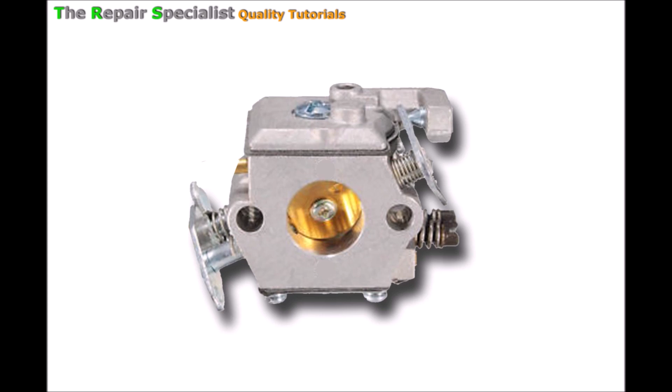First of all we'll bring in a carburetor - normally we get a little tiny carburetor like this on the two strokes. To show my point here, we'll have to make this diagrammatically. This is a side view of something like the carburetor we've just seen. We'll move this carburetor over here, and on this side we'll add the engine.

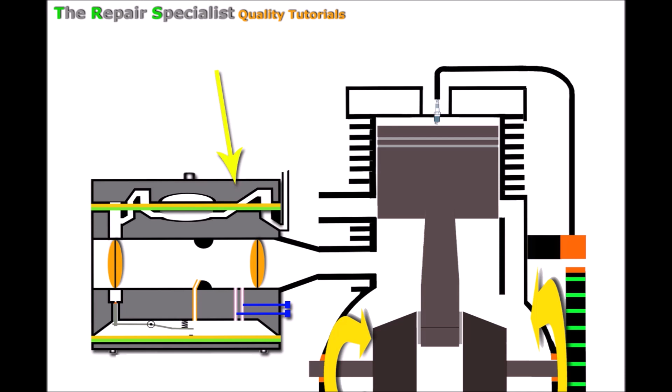To show you how the two-stroke engine with its carburetor can run in any position, upside down, to the side, etc., I need to go through the workings of it to show you how that allows for that. First we'll break it down and take a look at how the engine accomplishes this, then we'll see how the carburetor fits in. So focusing on the engine, we'll remove the carburetor and move the engine over here.

There's our two-stroke engine, but I want to put a four-stroke engine next to it so I can show why and how two-stroke engines can work upside down, and why the four-stroke in comparison cannot. Let's take a look at the two.

Without going into too much detail on how these engines work, because I've already got videos here on YouTube about how these engines compare with each other with function, I just want to go through the key differences as to why we can't use certain engines upside down and why we can use two strokes.

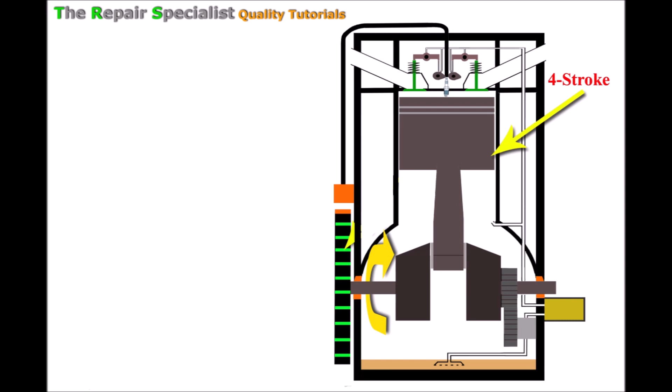First, let's take a look at why a four-stroke engine can't work on its side or upside down. It may seem obvious to somebody who knows a little about engines, but it all relates to the actual engine oil inside the sump here. So why does this engine oil stop this engine from being used in other positions?

Let's turn one of these engines on its side and take a look. If we did turn one of these on its side, we'd notice the oil wouldn't actually be in this position - it would be more like this. I realise I've put this diagram to the extreme, really horizontal, but we certainly wouldn't need the engine in this extreme position to have problems here. In fact, in this position the engine probably wouldn't run at all. I'm just overemphasising this for the sake of putting my information across.

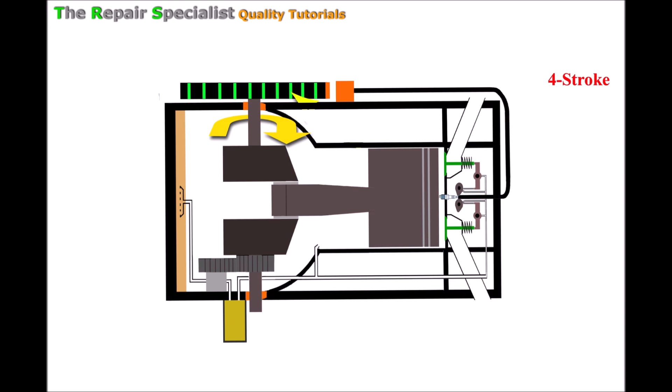We've already established that the engine oil would be in this position because it's a fluid. The trouble is that even before the engine started, the fluid will start to go up towards the piston and gradually seep up alongside it, even though there's a very tight clearance between the piston and the cylinder.

When the engine starts and the piston begins to lower, two main things happen. First, that lowering piston slaps into the oil sitting behind it, which lowers the piston's speed and efficiency. Because there's such a concentrated amount of oil in an unnatural place where it shouldn't be, some of that oil manages to get past the piston and seep past the piston rings, finding itself at the top of the piston where it shouldn't be. Even though it's a small amount, it still causes problems, and we'll see that shortly.

As that slight speed-reduced piston comes down even further to bottom dead centre, it experiences more of that oil behind it.

And as it drives into it, it experiences even more resistance, because we've got an even greater mass of oil as it gets down further. So we've slowed the piston down even more because of that greater amount of oil. Plus, there's oil gathering more than usual between the piston and the cylinder, creating a drag on the piston.

I just want to emphasise that the gap between the piston and the cylinder wouldn't be this large. I've had to exaggerate it this much to get my point across. The actual clearance here would be so small it could hardly be seen.

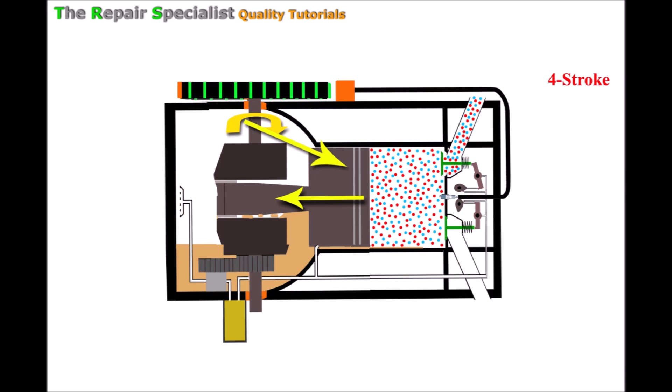As that piston starts to rise again, we might think it will have free travel up the cylinder, but we'd be wrong, because all of that oil that came past the piston ring, now sitting in front of the cylinder, is causing a drag on the piston. It may only be a smaller drag, but it's still a drag.

Also, we've got the drag from the oil in between the piston and the cylinder, which is also lowering the efficiency of this piston again.

And when the piston gets to top dead center on the compression stroke, where it should be compressing just air and fuel, we find it's now also trying to compress all of that oil that got to the top of the piston, and that's causing problems with combustion.

Because when the spark plug fires, instead of igniting that rich mixture of air and atomized fuel for a great combustion to push the piston back down, it's instead trying to ignite the fuel and air as well as this oil.

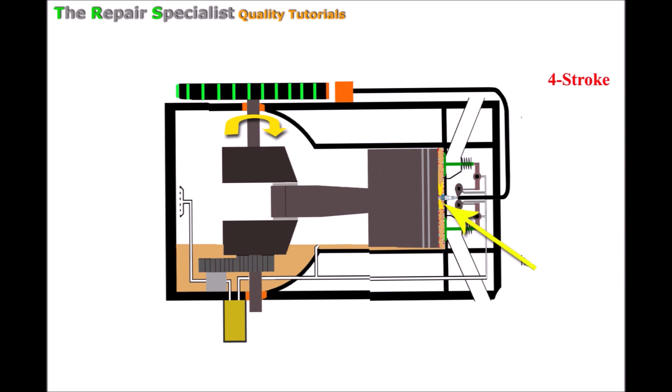And this engine oil is nowhere near as ignitable. So the factors reducing the efficiency of this piston are that it was already coming up at a reduced rate due to the drag between the piston and cylinder, and now it's trying to compress air and fuel with oil in it, which is harder to compress, slowing the piston down even further.

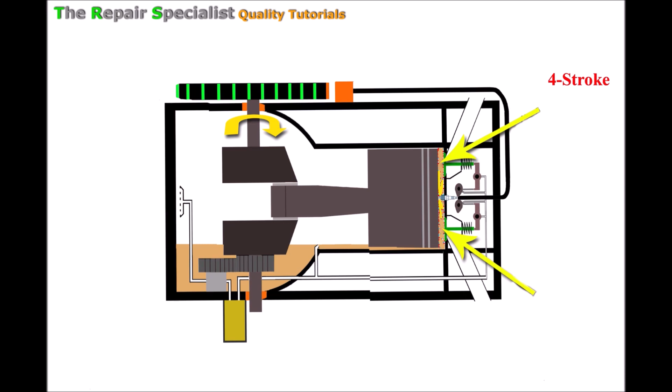Now that combustion has taken place, the piston will be pushed back down the cylinder, but instead of travelling down at a high rate from good combustion, we've got substandard combustion because of the oil that was in there. So we didn't have the same explosion, and it's now travelling down the cylinder at a lower rate.

And as if that wasn't enough, we've still got the oil drag on this side of the piston as before, as the piston's lowering.

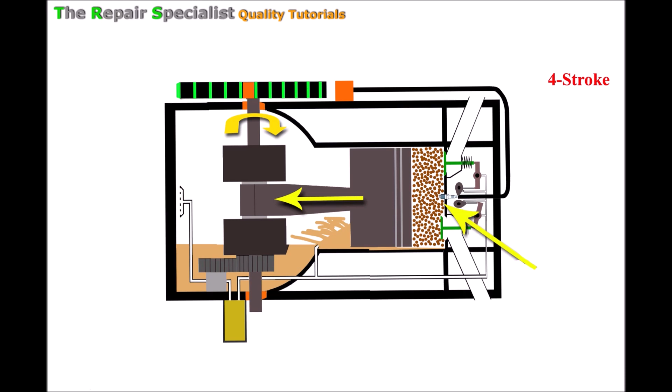And if we were to look above the piston now, in the wake of the combustion that's just occurred, we wouldn't have the usual exhaust fumes. It'd actually look more like this - there would be so much more waste in the form of blue or black smoke as a result of that incomplete combustion.

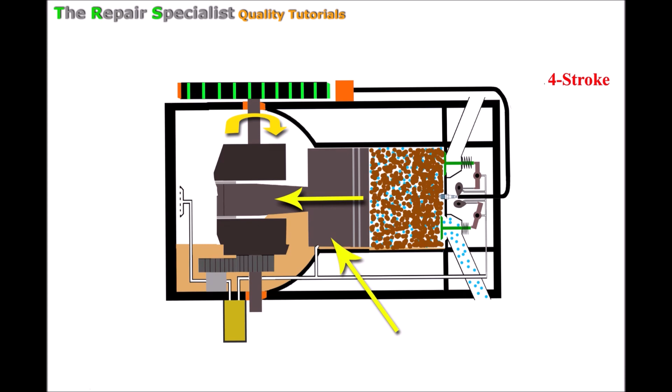And so that piston goes all the way down to the bottom of the cylinder to its lowermost point, with all of these drag points the oil is creating. And as the piston lowered, even though it was only on the power stroke and not an induction stroke, we're still going to get some of that oil seeping past the piston ring and entering the top of the piston again.

Okay, so now the piston's coming back up, and we've still got that drag because of the oil between the piston and the cylinder. And on top of that, slowing it even further, we've also got that oil on top of the piston, trying to push into it and slowing the piston down.

And of course, as the piston comes up, it's pushing all of those exhaust fumes out the exhaust valve and out of the exhaust. And as we've mentioned, it's going to be thick blue or thick black smoke because of the incomplete combustion of that oil on the last power stroke.

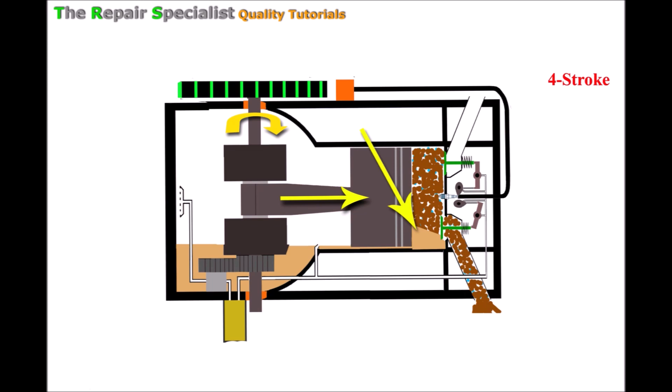And at the same time, this oil that's seeped past the piston on this stroke also starts to get forced out of that exhaust valve and through the exhaust as the piston travels up further. Again, this diagram is just to emphasise a point.

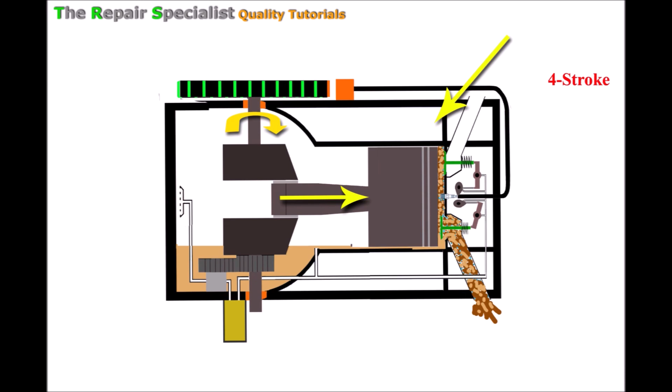I've tilted this engine to an extreme here just to explain things. Because of the position it's in, in reality this engine most probably wouldn't run at all. One thing I haven't mentioned yet is that if we tilt the engine like this, the oil can cause component damage. To explain that, we'll revert back to the engine as the piston's rising on the compression stroke.

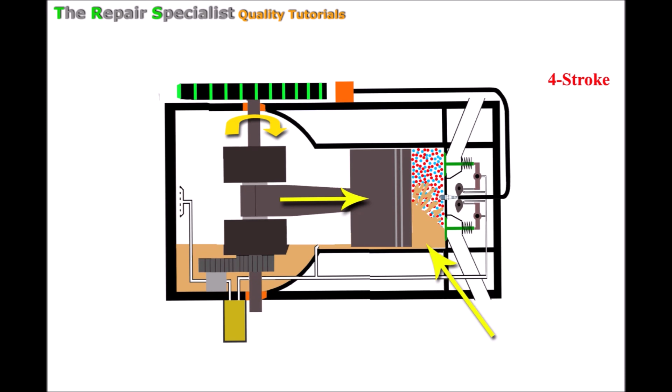As the piston's rising and oil seeps past the piston, sometimes more oil than expected ends up at the top of the piston, so it would look something like this. Because we've got that extra oil there, when the piston rises further into the compression stroke, it actually hits all of that oil. Oil is incompressible, and because the piston's moving quite fast, it hits that oil but stops dead and doesn't go any further.

The oil can't be forced out anywhere to give relief from this pressure because both valves are closed, since we're on the compression stroke. Now, because before all of this we had a lot of drag with this piston and incomplete combustion, meaning it wasn't moving as fast as it should be, this piston might likely come up and hit this oil and just stop the engine without any further damage. But if the piston's moving much quicker and then hits this wall of oil, it's going to create some damage somewhere.

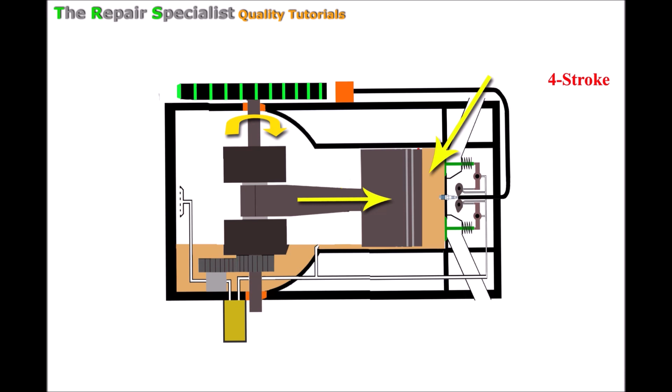That physical trauma is normally in the conrod here. Because the piston wants to come up so fast and it hits that wall of oil so hard, the conrod can sometimes shear. When this happens, where the piston is stopped by the oil like this, we call it hydraulic locking. So in this instance we'd say this piston is hydraulically locked. I've seen this happen a few times where customers have brought engines in to us, and we've taken a look and seen everything I've explained, with damage to the conrod.

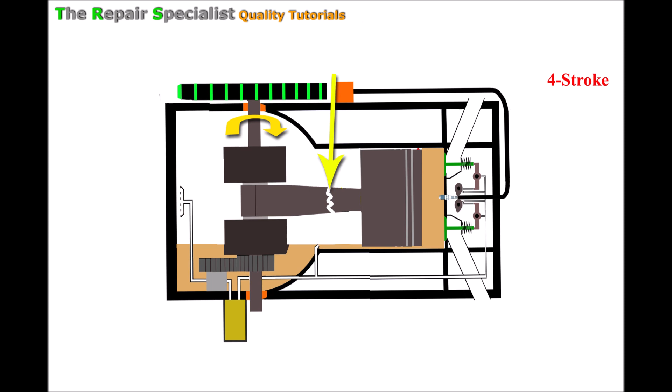Sometimes the conrods do shear like this, and sometimes there is some less severe damage. In other cases, there's no damage and the engine has just locked up. But the damage that occurs generally affects the conrods or the end caps, and it's not necessarily in this exact place, I'm just making a point here. There are other areas that can be affected, like the flywheel. Sometimes the key that locks the flywheel onto the shaft in a certain place can shear and allow the flywheel to turn unnaturally, in an unnatural position.

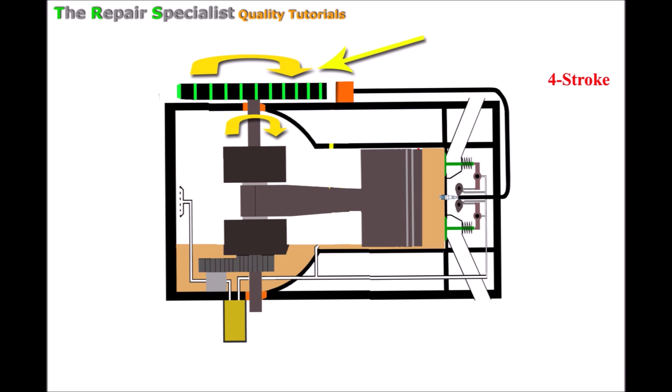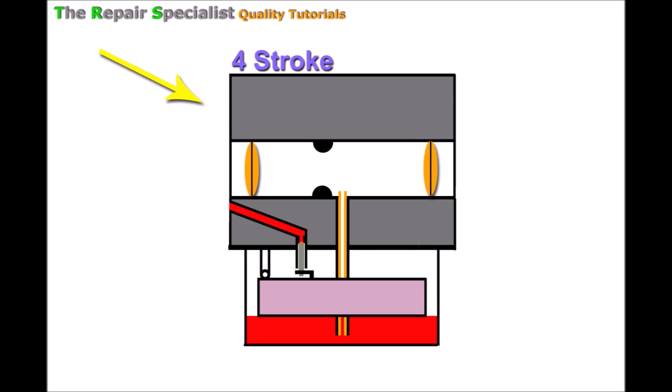One important thing I haven't mentioned all the way through this, and another reason we can't use a 4-stroke engine on its side like this, is the carburetor. This is a side view shown diagrammatically, and underneath here we've got the float chamber, which is basically a fuel reservoir for the carburetor. This is another very important reason we can't turn the engine onto its side. To better explain this, I can take the carburetor now and put it in situ onto the engine, and it'd look something like this.

Again, this is just a drawing to explain my point, things won't be exact to scale, but this is roughly where it would be, basically attached to the side of the inlet manifold. So now if we tip this engine onto its side, we know the oil won't be here, it'll be down here. And it'll be a similar situation inside the carburetor.

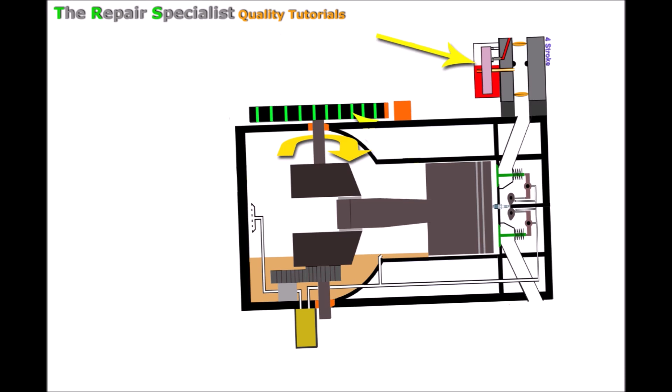The fuel won't sit at the bottom of the float chamber like this. It will of course sit like this because of gravity. In doing so, that fuel can start to seep in through the main jet and start to drip down into the inlet manifold of the engine. As it continues to flood the inlet manifold, it seeps past the inlet valve depending on what position the inlet valve's in.

Let's say the inlet valve is nice and tight there, let's say this engine was stopped on a power stroke, so the valve is airtight and fluid tight, then the fuel would congregate here. It doesn't mean this wouldn't cause problems, because indeed it would, because when we turn the engine back to its normal position and try to start it, we'd get an extra flood of fuel that we don't need inside the cylinder, and there'd be running problems.

In fact, it would flood the engine. Of course, the valve could be in this position, but it's more likely to be in a position that will allow this fuel through.

And when it does go through, it starts to congregate in the cylinder here. Remember, this engine isn't yet running, it's just been left on its side in its stopped position. But what we tend to find here, as with the oil, when it seeps past the piston rings when the engine's running and then it goes to the top of the piston, we get the same problem here with the fuel. But we don't have to start the engine for this to happen.

The fuel, because it's so light, not as thick and viscous as oil, seeps past the piston rings on its own. And in doing so, it starts to mix with the engine oil there, reducing the quality of that engine oil and its ability to lubricate, because it's thinning the oil down, and also increasing the fluid mass inside the crankcase, inside the reservoir.

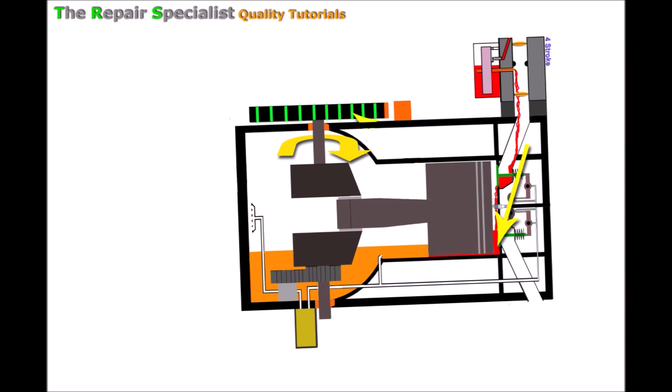Okay, so that's why a 4-stroke engine can't work on its side. So let's have a look now why a 2-stroke engine can. The 4-stroke engine has the oil, and that's why it can't. But if we take a look at the 2-stroke, we haven't got any of that oil inside the crankcase here. As we know, we mix the 2-stroke engine's lubricating oil with the fuel.

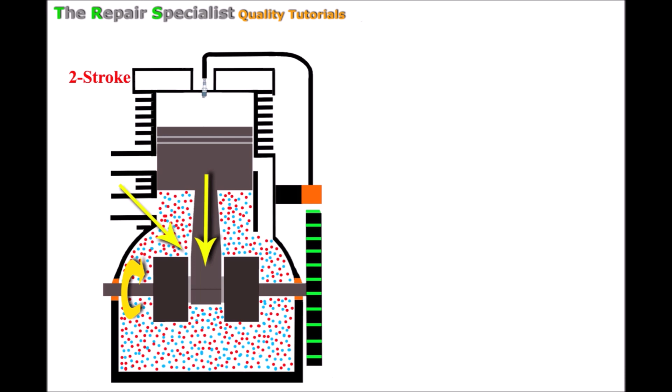Either that, or it's injected in a little later as it goes into the engine. But nevertheless, as the engine uses the fuel, it also draws all that lubrication in, and it lubricates all the parts of the engine as it uses the fuel. As you can see, in some places I've shown that there's no air and fuel in the crankcase, but when the engine's running, there always will be some.

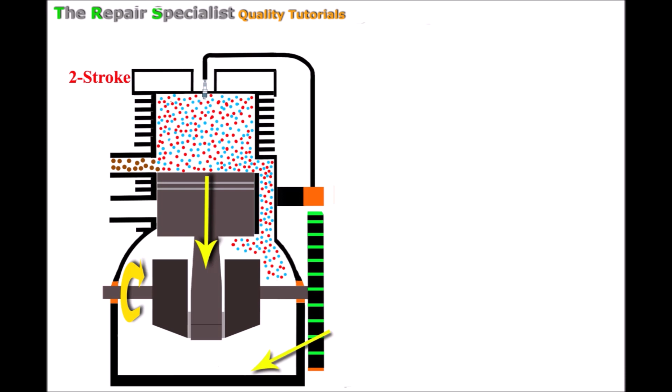I've only shown it flowing like this so that I can show the actual flow of the air and fuel through the engine. But the moral of the story is there's no oil down here in the crankcase like there is in a 4-stroke, and so we can use this engine in any position like this. And that includes being able to run just as efficiently upside down.

And so this relates to how the engine can do this, but what about the carburetor? Let's take a look at that. A little earlier on we took a look at the 4-stroke carburetor and we saw that because of the fuel inside the float chamber there, we can't tip this carburetor onto its side, because the fuel spills through into the main jet and comes out in the induction area right down into the engine, causing those problems we mentioned.

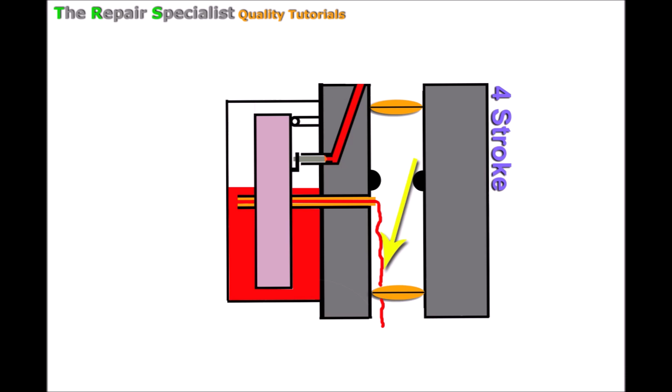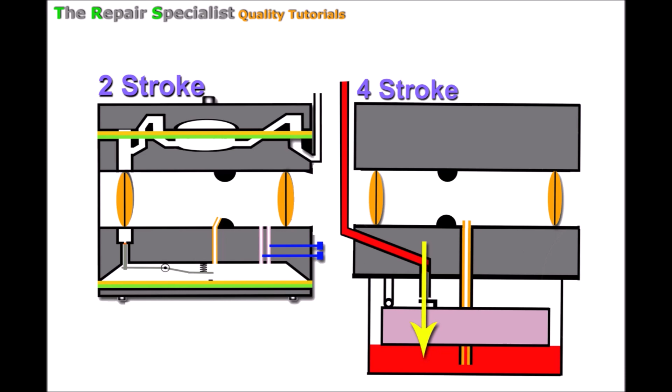So taking a look at the carburetor in its normal position, we see that it needs to be in this position in order to function correctly. We know that because we need a supply of fuel fed by gravity to this particular type. And it's that gravity feed which fills the bottom of the float chamber with all that fuel, ready to be used by the carburetor. That means we have to have a fuel tank positioned higher than the carburetor in order for it to feed the carb.

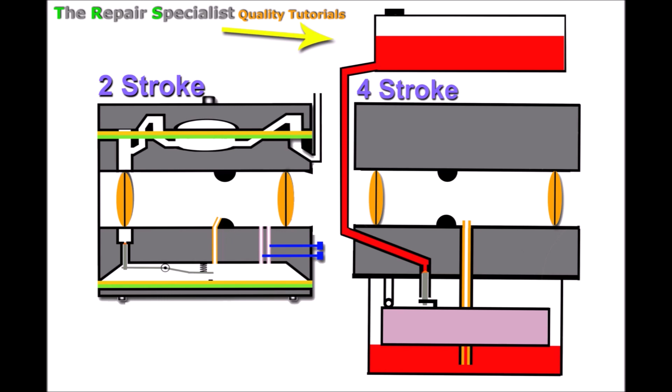But as we'll see, the two-stroke carburetor is very much different. There is a storage reservoir here in the carburetor for fuel to be available for the jet, but this fuel down here is more containable. It doesn't seep out of this area as it does with the four-stroke. That's because in order to allow any fuel out of here, there has to be more fuel allowed to flood in, or some air or something to take its place. Otherwise, there would build up like a little vacuum in here, not allowing any fuel out.

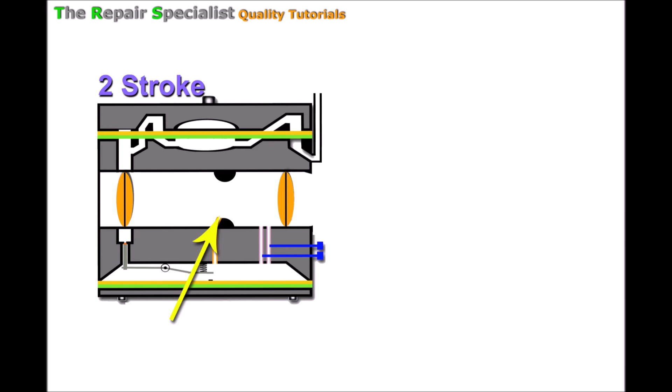And that's regardless of whatever position this carburetor's in, even if it's totally upside down like this, and I'll explain why a little more. For now, let's just flip it back over where it was. There we go. And just to explain things a little better, let's revert back to our four-stroke carburetor again. As we know, down here in the float chamber, that reservoir, we've got the fuel, and above the fuel on the four-stroke, we've got air in there. We need this normal amount of air in there for two main reasons.

To explain the first reason, let's imagine this carburetor has never had any use, so it's totally empty inside, no fuel in there whatsoever. Because there's no fluid for the float to float on, the float would be down at the back under its own weight, pivoting at the front here. This is how the carburetor would be if it was brand new and had never had fuel in it and the engine had never been started, or if it had been cleaned out and put away for winter.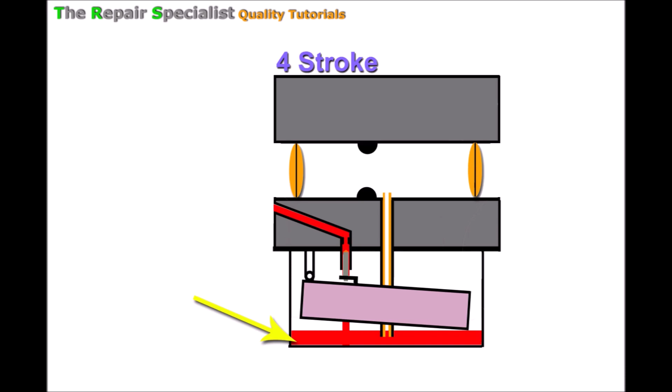With the float down and the needle valve open, adding fuel now means it will flow right past the needle valve and into the bottom of the float chamber. When the fuel flows in, it lifts the float, but what I want to emphasize is that as the fuel comes in, it occupies space inside the float chamber. The more fuel that comes in, the more space it will need to occupy, and above the fuel there is the air I was talking about earlier.

As the fuel flows in, this air has to move somewhere, otherwise the fuel wouldn't be able to flow into the float chamber. What happens is this air escapes out of the float chamber through a special tube, like a ventilation tube. These vary in shape and size depending on the carburetor type, but they'd be something like this. So as the fuel rises, the air above it escapes out of this tube and out of the float chamber.

As long as the carburetor is in its correct upright position, no fuel can escape down this breather tube, because the level of fuel only comes to this level—it will never come to the top. That's because when the fuel gets to a certain height, the float lifts up and shuts off the needle valve, stopping any more fuel from coming through.

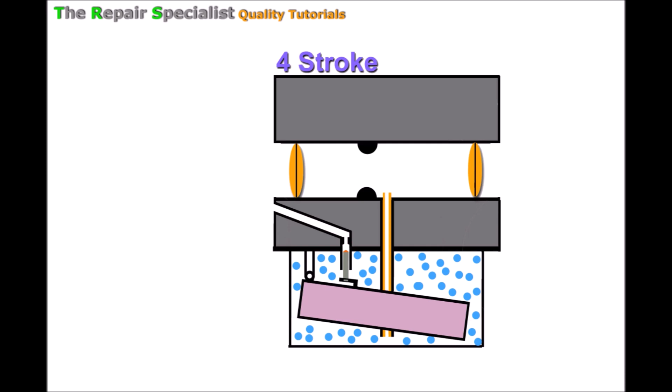Now let's take another look at this unvented carburetor, where in this scenario the air can't escape when fuel comes in. Let's see what happens. It would most likely try to come into the float chamber, but as the fuel flows in, it tries to push out that air above it, and it can't do so well. It might get to a certain level, but as it gets further up, it'll start to push against that air.

It won't be in high enough concentration or pressure to compress that air. As the fuel continues to flood in, the little air pressure in here builds up enough to push up on the fuel, stopping it from entering the float chamber. Just for illustration, I've shown the fuel being this high because it will rise to the bottom of the main jet.

Remember, the bottom of the main jet will allow air out, so it allows that expansion of fuel. But once the fuel reaches the bottom of the main jet, no more air can get out because the fuel is now blocking the bottom of the hollow tube, preventing it. So in a nutshell, the problem here is we can't get enough fuel, or the right amount of fuel, into the bottom of the float chamber.

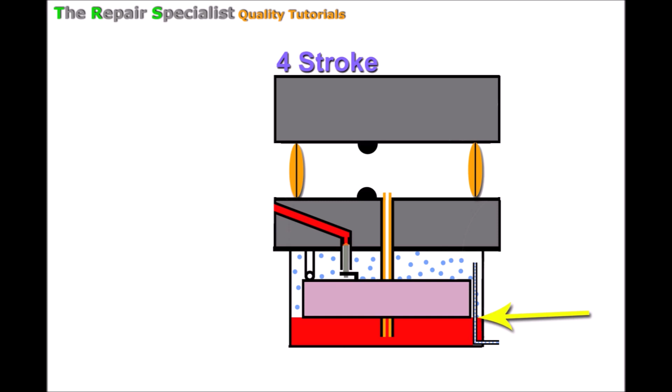With this, as the engine tried to run, it wouldn't be able to efficiently take the amount of fuel it needs, and it wouldn't run well at all. So really what we'd encounter here is a fuel starvation issue. We can see now why this simple but effective breather system is vital for the carburetor.

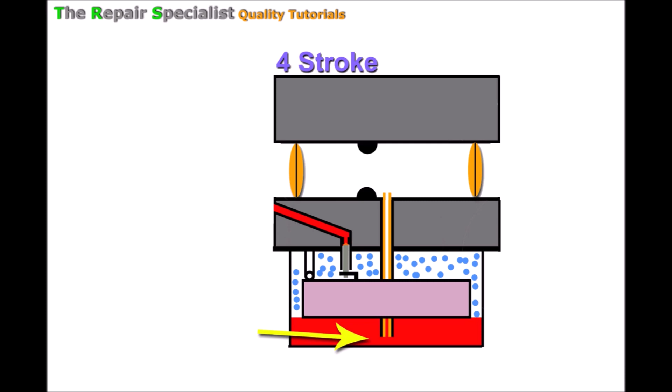But let's look at another scenario now. Let's imagine we can get enough fuel inside the float chamber. Even if we could get enough fuel down here, when we start the engine, the fuel starts to leave the float chamber through the main jet and into the inlet of the carburetor, where it's drawn out and mixed with air for the engine's usage. Because the engine is quite demanding, the fuel leaves the float chamber quite rapidly, which means periodically we've got a smaller amount of fuel here at the bottom.

And although this fuel is being constantly replaced because we've got the float hanging down at the back, the needle is open, allowing fuel in as it's being used. In certain situations where the engine's more demanding for fuel, such as revving to full maximum revs, or using the choke, we're going to get a sudden surge of fuel out, just slightly more than we can get fuel in.

This may only be for a split second, so we'll always have fuel there to use, but when it does happen, a slight vacuum appears in the air. That's because of this fuel leaving the float chamber, and in order for a vacuum not to occur, we need to replace the fuel being lost with more fuel or air above it.

As we lose fuel out of the float chamber, more fuel does come in. It's when we get sudden surges, where fuel is used in high amounts just for that moment, that we get this vacuum problem. In those periodic moments, we can't get enough fuel in to replace the fuel lost. So just when the engine needs that maximum amount of fuel the most, there would be less available—it's actually pulling back at the fuel to stay in the float chamber.

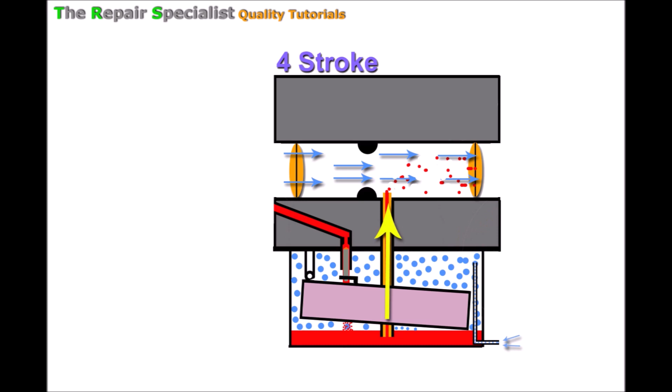With this particular issue, we can see why this ventilation tube is vital. As soon as a vacuum builds up inside here, it will draw in air from the environment into the float chamber, neutralising that vacuum. That means the fuel can now flow freely up the main jet and out into the inlet of the carburetor to supply the right amount of fuel for the engine's needs.

So in a nutshell, what I'm trying to emphasise is that this type of carburetor is designed to run in this position and is entirely reliant on gravity. The fuel comes from the fuel tank under its own weight, under 1 atmosphere, 14.7 pounds per square inch, under gravity, coming down into the carburetor and lying at the bottom, waiting to be used in the engine.

Of course, when the engine draws that up, it's a different matter, but solely to get that fuel to where we need it, it all relies on gravity. And also we've got the float here that goes up and down in order to regulate the fuel coming in—that also relies on gravity.

So we can now see that if this carburetor wasn't firmly fixed into this position, relying on gravity, because that's what it's designed to do, then the mechanisms involved simply would not work the way they should. Therefore the prospect of using this carburetor in any other position than this is near non-existent.

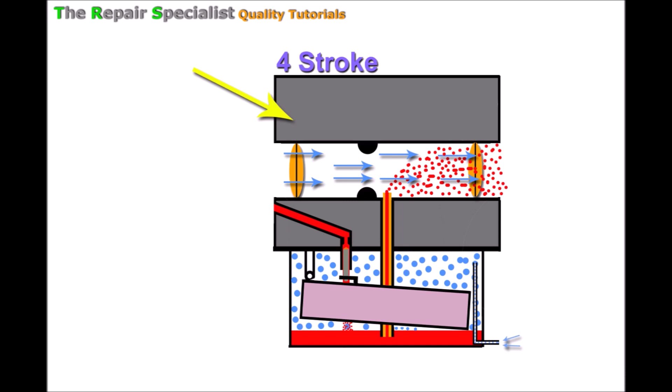So in contrast, the two-stroke carburetor is very much different. One main difference we'll notice, and what's characteristic of these small two-stroke engines, is that we've got a fuel pump here inside the carburetor. So this carburetor doesn't actually have to rely on gravity in order to feed it fuel—instead, the fuel pump draws in the fuel.

Each time the fuel pump rises, it creates a vacuum and draws in fuel from the right hand side of the image. Then when the fuel occupies underneath the fuel pump, as the pump lowers, it pushes fuel out on the left hand side, right round the carburetor, down towards the little needle valve.

The operation of this pump means that the fuel inside this carburetor is under pressure. Unlike the four-stroke carburetor, which relied only on gravity to get that fuel through, this carburetor pumps its own fuel through, so there's going to be some pressure inside as a result. We'll soon see that this is exactly what we need to use this carburetor in any position.

So that fuel has come down to this point, to the needle valve, under pressure. But as the diagram shows, it can't get past the needle valve because it's closed. In reality it actually could, because if the fuel pump is working inside the carburetor, that suggests the engine's moving—so we're cranking the engine to try and start it.

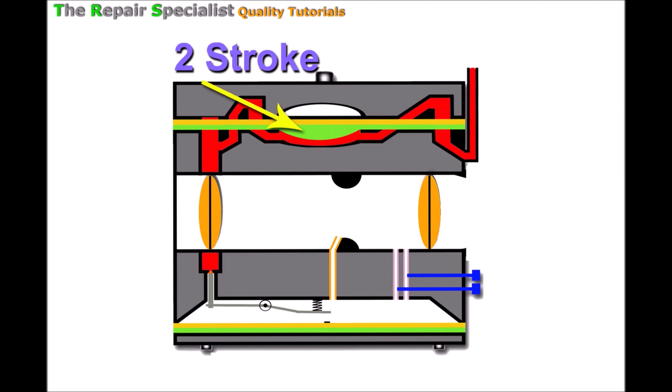If we're trying to start the engine, we'd have air coming through the inlet area of the carburetor. And it's that air that creates a vacuum, as I've shown in my other videos, drawing out of the main jet there. And when that vacuum draws out of the main jet, it pulls this diaphragm down.

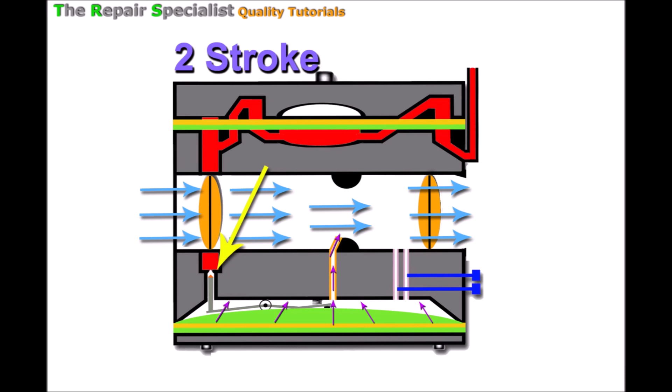This is the metering diaphragm. As it does so, the metering diaphragm physically pushes the back of the metering lever upwards. And because it's pivoted in the middle, it pushes the front downwards. And down with it comes the needle valve.

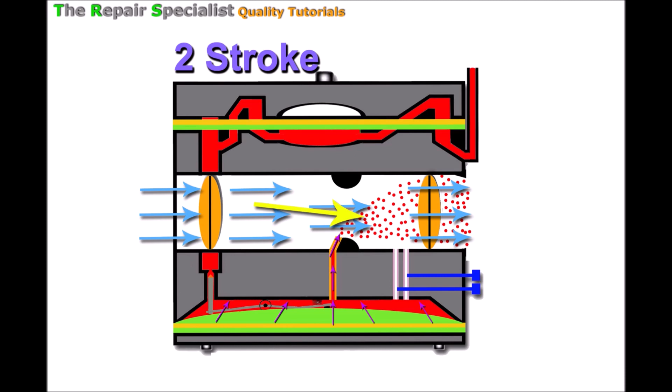That now makes an open channel for the pressurized fuel to flood into the metering area here. And when it reaches the main jet, it can then be drawn out of the main jet by that vacuum. So now with this vacuum pressure pulling out the fuel, and the pumping pressure of that fuel pump at the top pumping the fuel round to this area, we've got a constant supply of fuel for the engine to run correctly.

It can provide that fuel regardless of the position the carburetor's in, whether it be on the side like this or upside down, any position whatsoever. The carburetor will continue to function normally and provide the right and adequate amount of fuel to the engine for usage, and it's designed this way purposely, and we can see now why.

It's because independent of its orientation we can always get fuel up here into the metering area ready for the main jet to use, and that's because of the fuel pump down here that's always pumping fuel under pressure, drawing it in from the fuel tank and then pumping it round to the rest of the carburetor, ensuring that the whole carburetor gets all the fuel it needs.

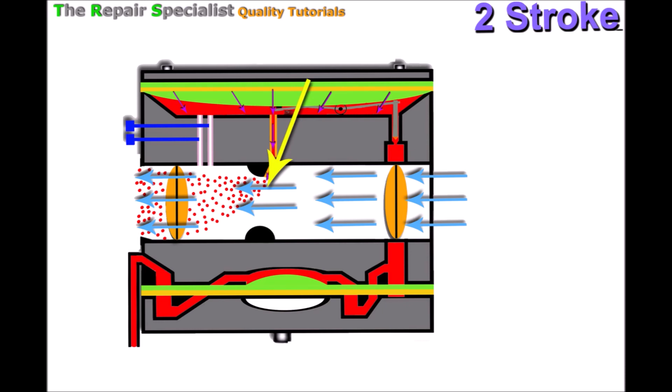One last component I want to talk about on this topic, and something else that allows this two-stroke engine to work upside down, is the fuel tank. As we can see on this simplified drawing, we've got the fuel here shown as red in the fuel tank, and we've got this fuel pipe here that goes and feeds the carburetor.

Normally by the time the fuel gets into this fuel pipe, it's been filtered, so we normally have a fuel filter somewhere like here. However, having a fuel filter stuck to the side of the tank isn't something we usually see.

Instead, what we normally see, and what's characteristic of these small two-stroke engines, is that we have the filter which can reach right across the other side of the fuel tank. And it can do this because it's connected to an internal fuel pipe, which is connected to the main pipe that feeds the carburetor.

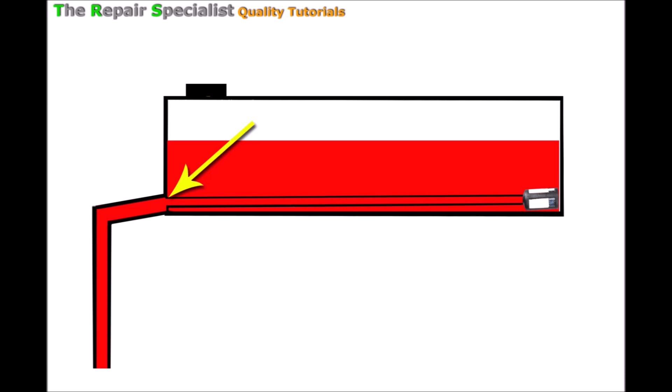So because of this pipe, fuel can be picked up and used inside the carburetor regardless of which orientation this fuel tank is in. So let's take a look at it on its side. We can see that all the fuel has dropped to the bottom.

But because we've got this pipe allowing this fuel filter to drop into that fuel, it can still suck fuel out for carburetor usage in this position.

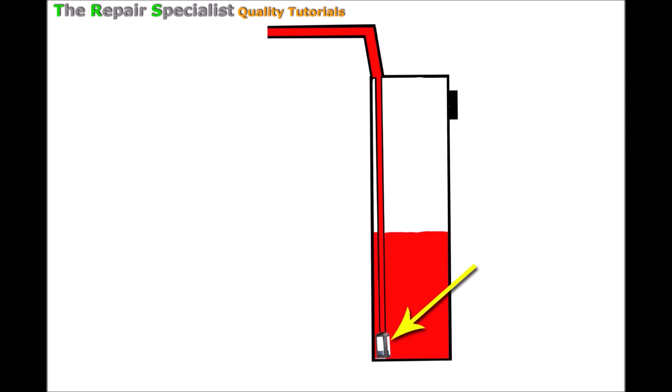Let's have a look what happens now if we turn this fuel tank totally upside down. Of course the fuel drops to the bottom, as it should, and what we've got again is the fuel filter inside the fuel, connected by the pipe, so it's still sucking up the fuel and supplying it out to the carburetor again.

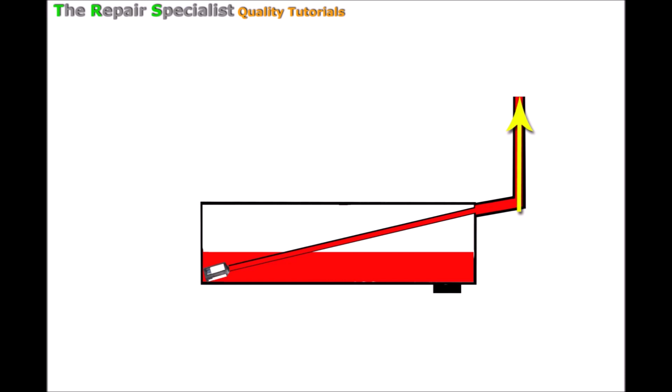And lastly, let's take a look at what happens when the fuel tank is tilted this way. We can see the fuel has followed its usual path with gravity and gone to the bottom area of the tank, and what we can see with the fuel pipe is that it's bowed over in an N shape.

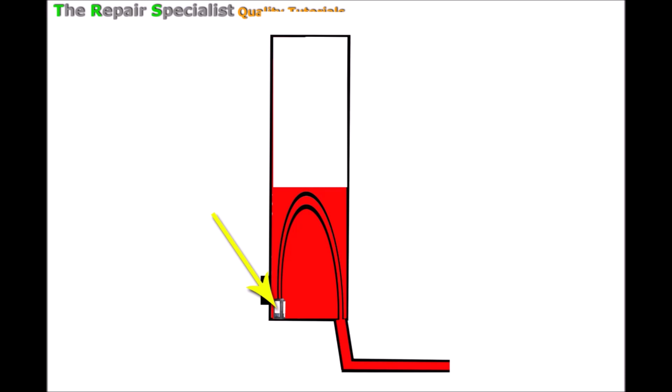What's happened is now, as a result of that, the fuel filter is where it should be, at the bottom of that fuel, because the fuel filter is moving under its own weight, and that's what's allowing this to happen. And of course with that we've got fuel being able to be drawn out of the fuel tank no problem whatsoever and out to the carburetor again in a good feed.

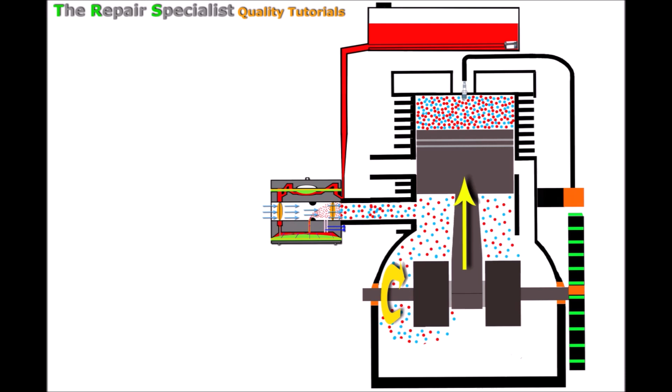And I hope that goes a long way to explaining why and how the good old two-stroke can run and function normally in any orientation.